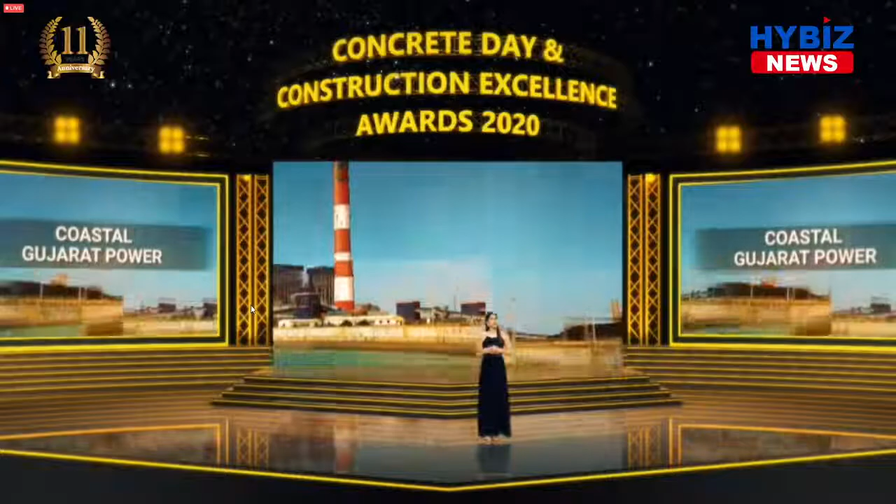Monumental structures like the Statue of Unity, Bandra-Worli sea link, metro rails, coastal Gujarat power projects, Motera Cricket Stadium, and the Bogibeel Rail Bridge project, along with the most recently inaugurated Atal Tunnel, are testimony to some exemplary collaborations in nation building.

A visual gallery of these structures is available for your personal viewing in our pre-function area on the landmark wall.

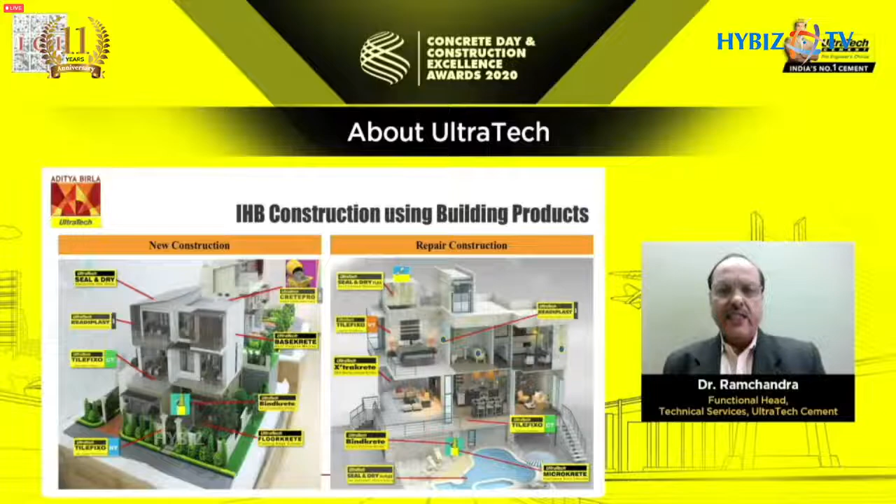Building stronger bonds every day. The Aditya Birla Group is committed to bringing positive changes while building the future of the nation. Reflecting its values, brand UltraTech is not just the strongest, biggest and largest in the industry on several fronts, but has also pioneered cutting-edge technologies from products to logistics. Can we have the AV, please?

A vision becomes a milestone when it helps make our lives richer with love and laughter, when it helps make a cleaner, smarter, and more beautiful planet, so that you can set off on joyous new journeys and adventures. Building stronger bonds and bridging impossible distances, which take you from the ever new to the forever beautiful, opening up vistas and windows to a vibrant new world. A vision becomes a milestone when it touches millions of lives every single day. Aditya Birla Group, big in your life.

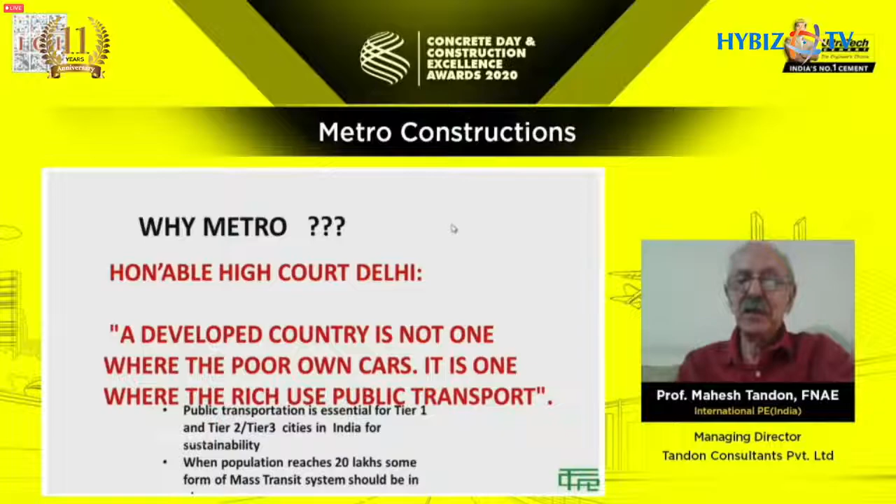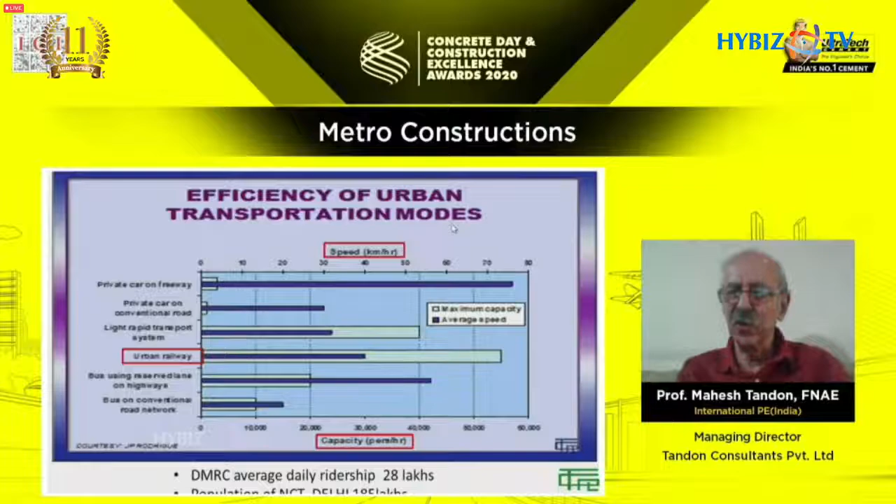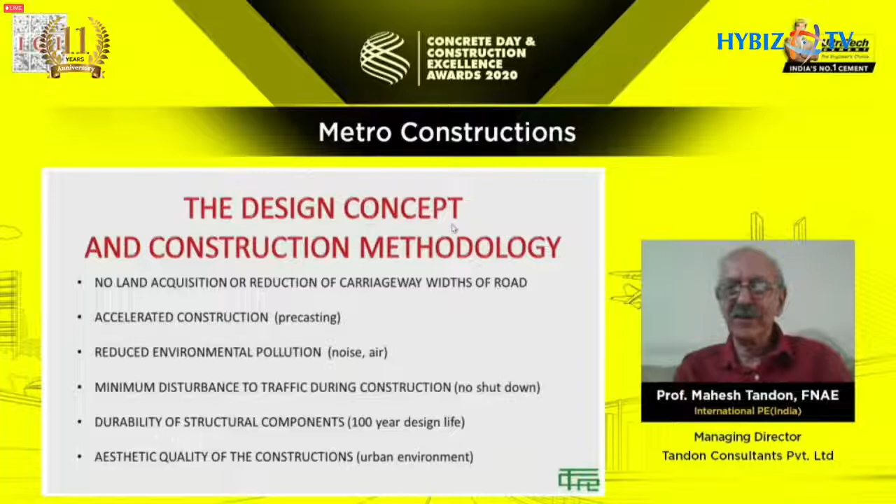Finally, the aesthetic quality of the construction becomes more important because these metros are in the urban environment, and their aesthetics counts a lot. If you want people to own this mode of transportation and be proud of it, then it must look good also.

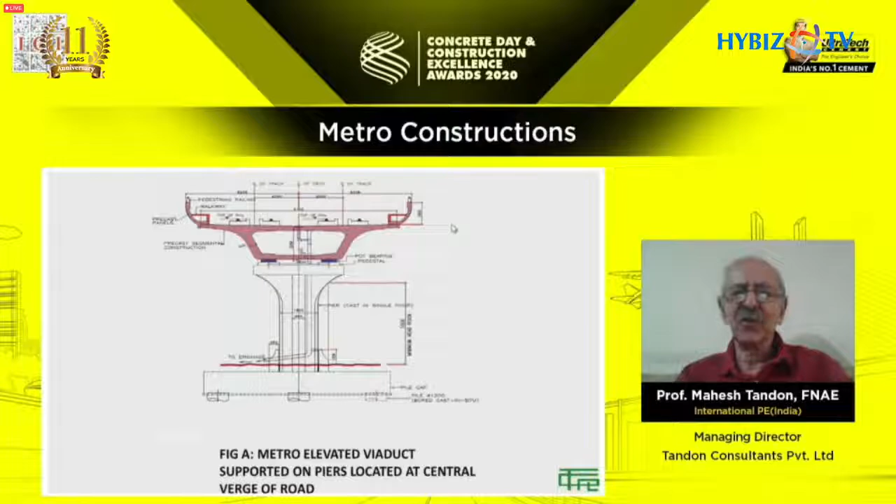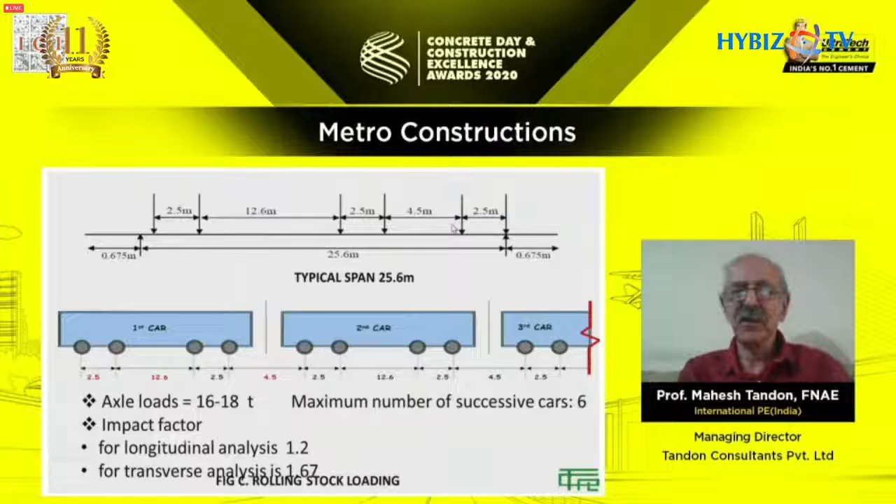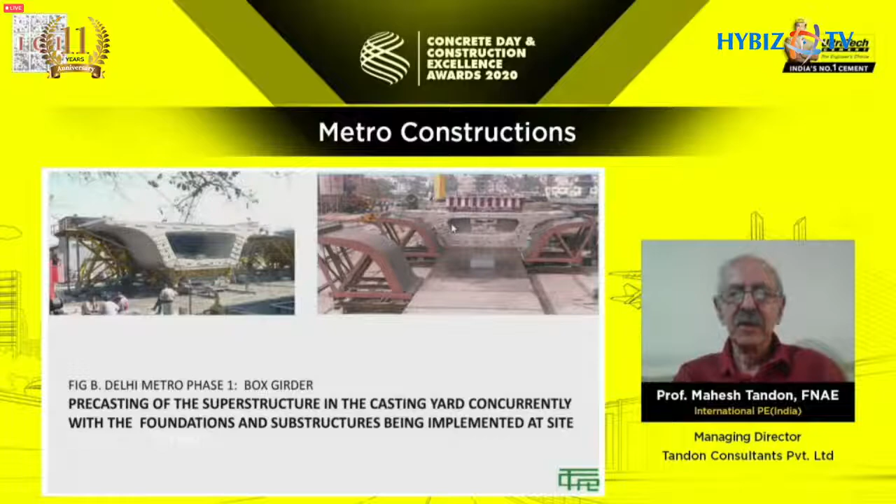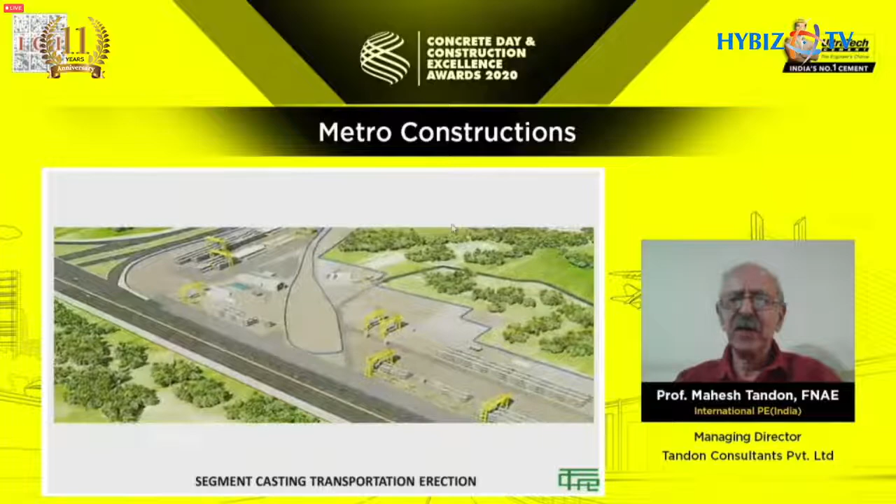I want to show you a small clip which demonstrates exactly what the precasting technology is, in very few words or very few pictures. So here you can see something which is in the casting yard.

What is happening is that there is already a precast segment which you see behind. In front of it, we are lowering a steel cage which is put in position. Here you can see the internal shutter being put in position. So you have got the sides already in position, you've got the reinforcement in position, and now we are sliding in the bottom shutter. It is like a tunnel formwork, if you may call it that.

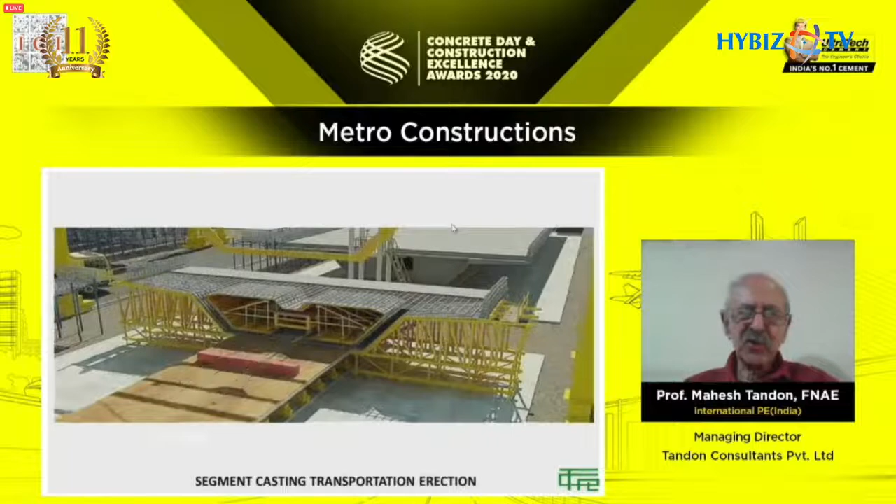Once this is in position, we can close the ends so that it is ready for concreting, and that is what you are going to see in a minute. There the ends are closed. Now you've got a compartment which is watertight, and you can put the concrete.

So the concrete, as you can see, is poured against the already existing segment which you saw behind, which is still there. So the concrete, when you pour it, it is all liquid, and the interface between the new concrete and the old concrete will be completely in sync.

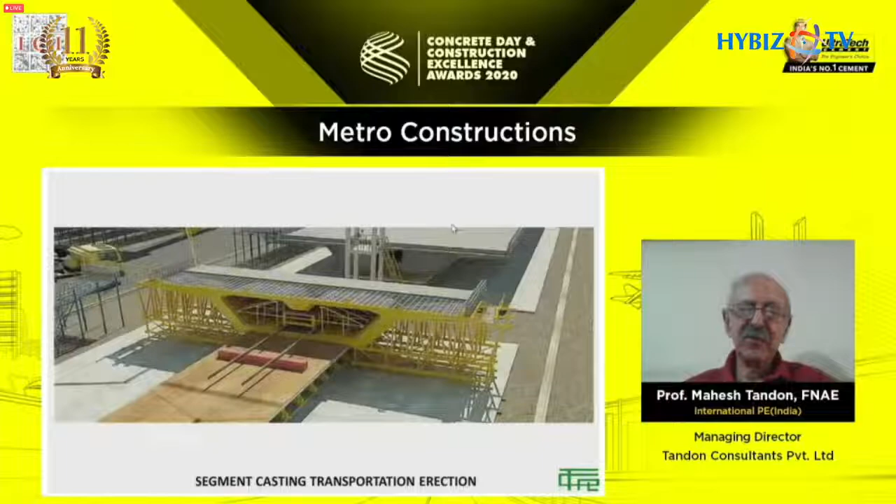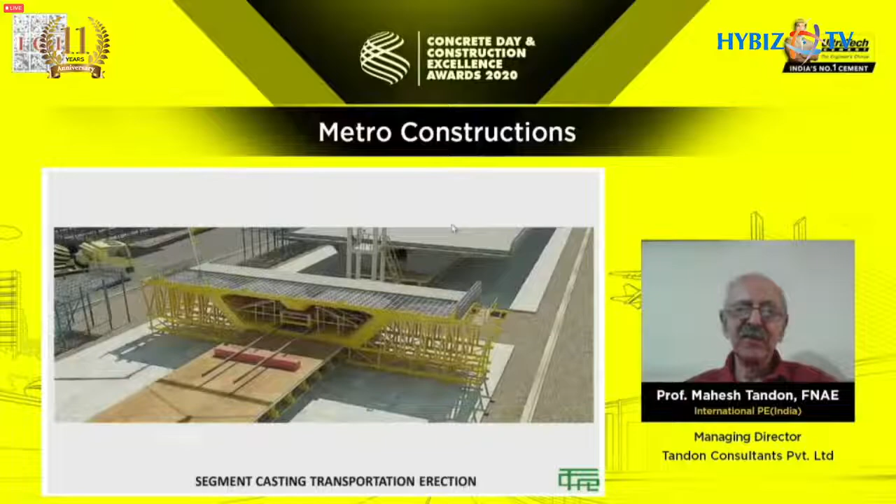That is the whole idea of this technique of precasting, and this is called match casting, because the two faces at the interface are a mirror of each other, so perfect that you couldn't even get that type of perfection even if you were to machine it.

Here you can see the rest of the segments being concreted and put in position much the same way as you saw in the earlier slides. After that, the segments go to the stacking yard.

We require a huge stacking yard because the segments keep on being produced, and you require storage space, which we term the stacking yard. From here, it is taken to the site by the trailer which you just saw, which went past.

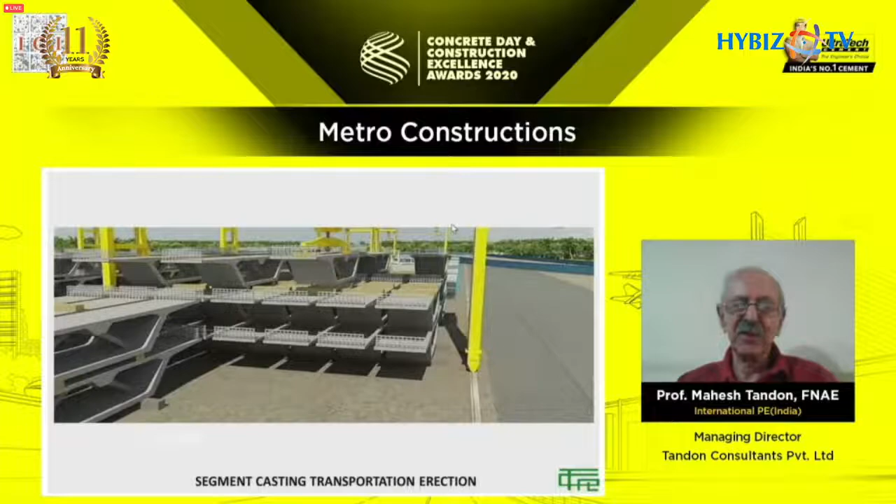What are the types of sections that metro constructions have? On top, you can see a precast, pre-tensioned, full span twin U-girder, meaning there are two tracks and two structures right at the top, shown in pink. You can also have a U-girder with two girders, or two tracks, on the same section. You can also have a box girder, shown in the subsequent two sketches, and of course I-girders, which can be either pre-tensioned or post-tensioned.

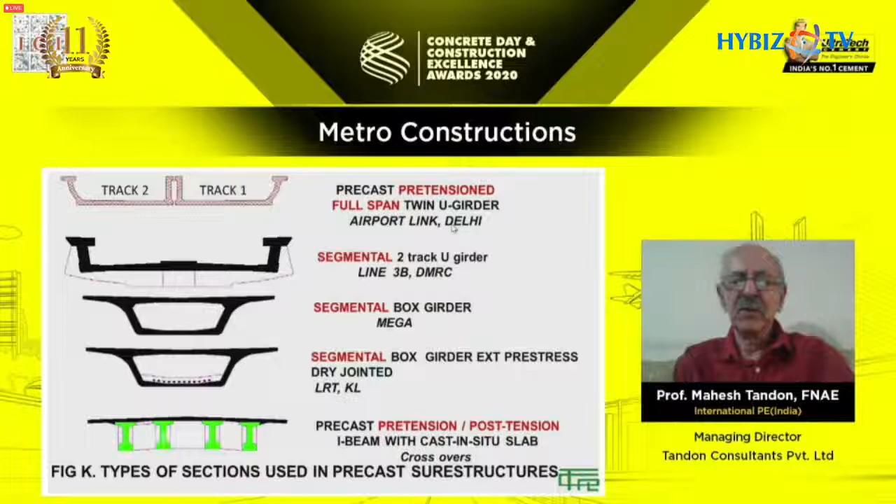The important issue is that in the first sketch at the top, it is a full span, whereas in the next three you have segmental, meaning they are made in small segments, as you saw in the previous slides. The I-beam and I-girders, we know, are for the full length, and that is how it is concreted. It can be pre-tensioned or post-tensioned.

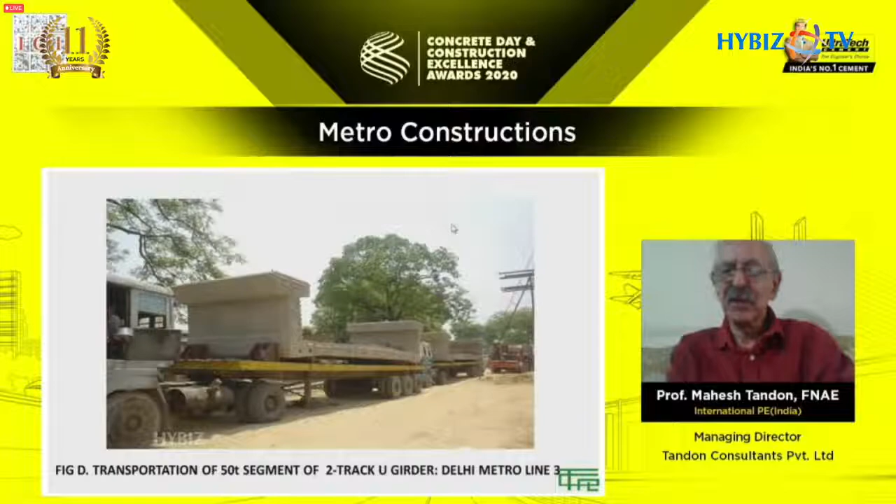The transportation of precast elements depends on whether we are talking about segmental construction or full span. For segmental construction, this is a segment of a U-girder which can carry two tracks, transported on what is called a low bedded trailer. We make it as low as possible so that when taking turns along city roads, it doesn't overturn. You have to keep the center of gravity as low as possible, which is why it's called a low bedded trailer.

Then there is the erection of precast segments after transporting them to the site. For segmental construction there is one type of equipment required, and for full span construction there is another type. If you look carefully, the lines on the superstructure are the segments which have been put in position, hanging from the red launching truss at the top. After they are properly aligned and jointed together, the whole launching truss can move to the next span.

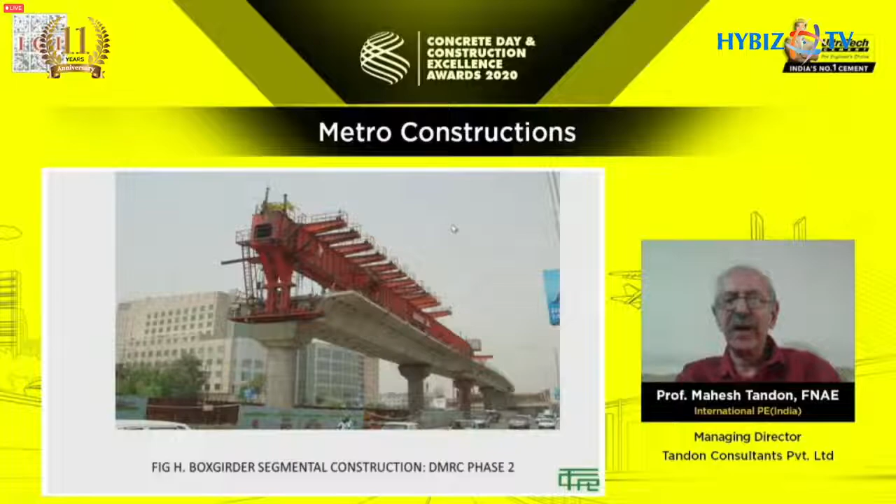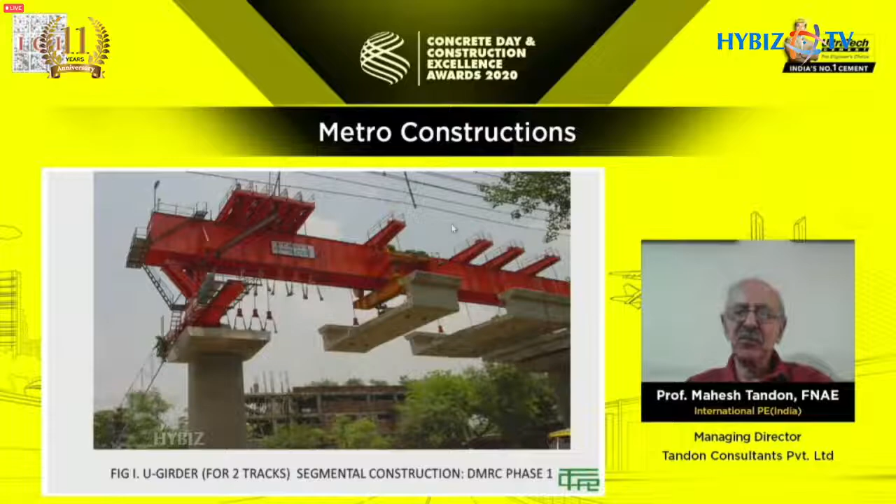So it is also called the self-launching truss. Here you can see another type of precast segmental construction, which is the U-girder, which can carry two tracks at the same time. Now, how does this segmental construction work?

People often ask this question, so let me explain. There are three issues which come into play. One is the match casting, which you have already seen. There are shear keys at the mating surfaces, which you can see clearly. And you can also see that this is going to be pre-stressed. It is the combination of these three issues which makes sure that the segments you have erected there don't fall down. Once you have assembled and pre-stressed, they remain in position.

Here you can see the shear force. Shear is being transferred across the joint, which is the interface of the shear keys. By these horizontal arrows, you can see the pre-stress. So if one segment has to displace vertically against the other, it can't, because the shear keys will not let it happen. And the two segments cannot go apart because of the pre-stressing. This is the technique which makes sure you can do the segmental construction, and all three are necessary.

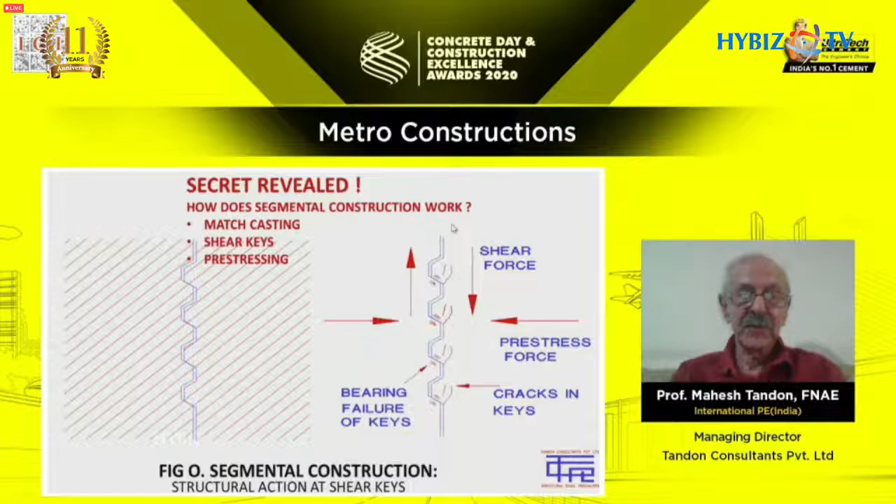Let's go to the next one. Standardization is the key to precast segmental construction technology. The spans need not be the same across the entire alignment. As a matter of fact, they often keep varying depending on the type of obstacles you have to cross. You cannot put the pier wherever you want, even on the central verge - sometimes there are buried services or pipelines. So you have to keep changing the spans, and this flexibility must be introduced in the precast segmental technology used for metro constructions.

But standardization is in this sense: as you can see here, this is a simply supported span, and you will have pre-stressing cables which go from end to end. The central part of the pre-stressing cable is kept horizontal, so that only the ends remain the same. If you look carefully, the end segments do not change, but you keep introducing more and more segments in the middle, where the pre-stressing cable is horizontal.

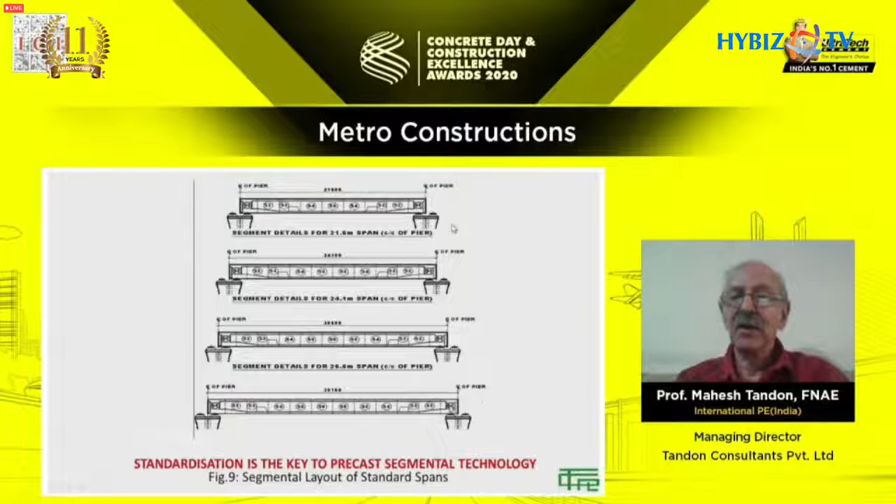To look at it another way, if you look carefully at the bottommost sketch, it has all the segments which constitute the maximum span. If you want to make a smaller span, you take out segments from the middle one by one, and you can keep making the span shorter and shorter.

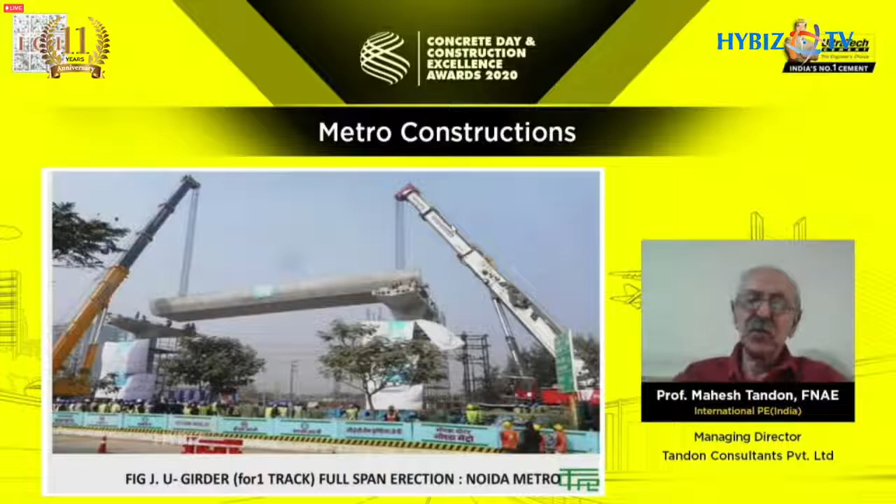When you have a full span erection, which you can see in this slide, you require two cranes as shown, and the girder weight may be as much as 150 tons. You have to pick it up from the transportation trolley which you saw in the earlier slides, and put it in position. Obviously, the width of the road, at least temporarily, must be wide enough to accommodate the vehicle bringing the segment.

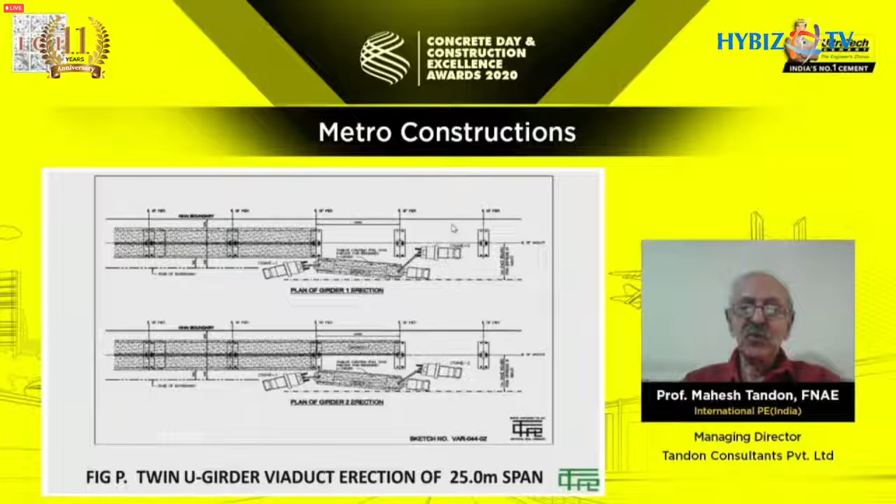The upper sketch shows how the segment has been brought into position. There are two cranes which are lifting it up and putting it in place. Now you have to lift and put in position two girders in the same span. So you can see the first one being lifted in the upper sketch, and the second one being lifted at the bottom in the bottom sketch.

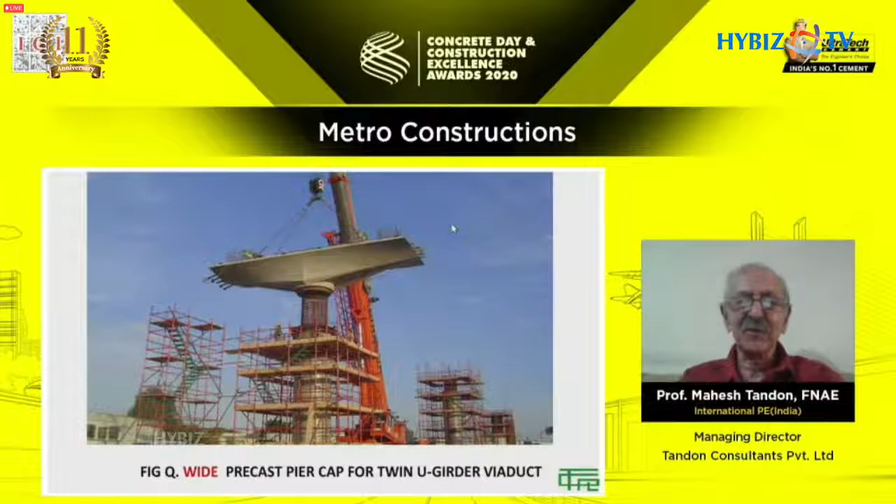And there is something else called a concourse level, which is the first slab from the bottom. And all this must have a roof, which is normally made in steel. So this is what constitutes the station.

The stations are always a problem as far as timing is concerned. Fairly quickly you can make the viaduct, and it goes on at a pace. But of course, the stations are another issue altogether.

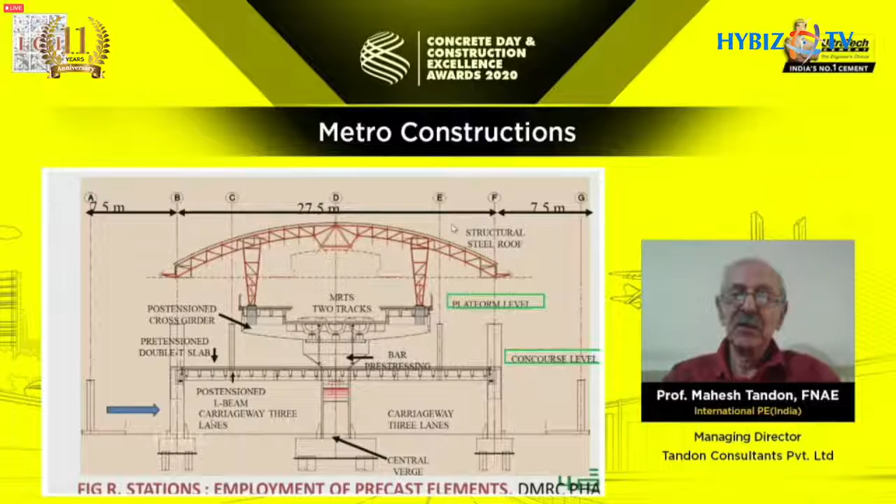If you see a small animation, after making the foundations and the piers, we have to have a sequence of construction, because they are one above the other - what constitutes the concourse level and what constitutes the platform level. So how it is to be done, the sequence is shown here.

This is the post-tensioned girder, normally very heavy. It can go up to 80-90 tons, and it has to be put in position on top and post-tensioned to the pier. Here you can see the making of the concourse slab, and the sequence in which the construction is being made.

This is crucial to plan right in the beginning. The double-T's, as we call them, which constitute the concourse level, are stable by themselves. That is the big advantage of a double-T. Many people try to use single girders, but they are not as efficient, because you have to make sure they don't topple while being put in position.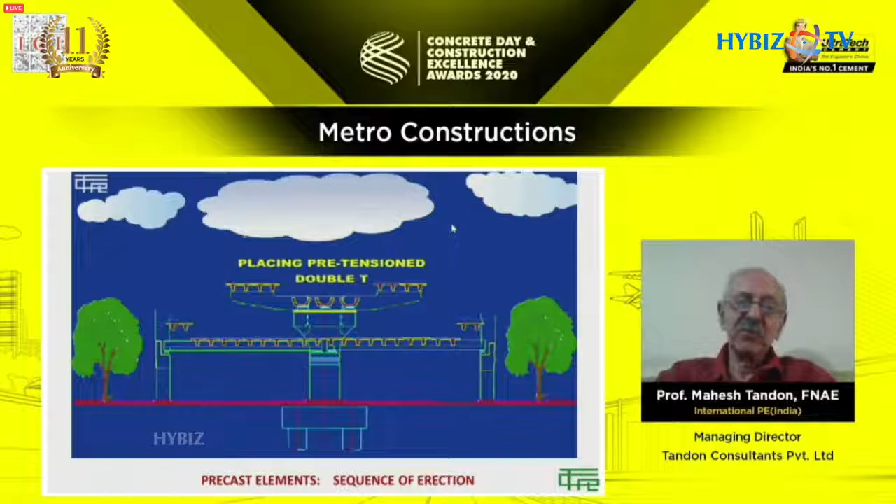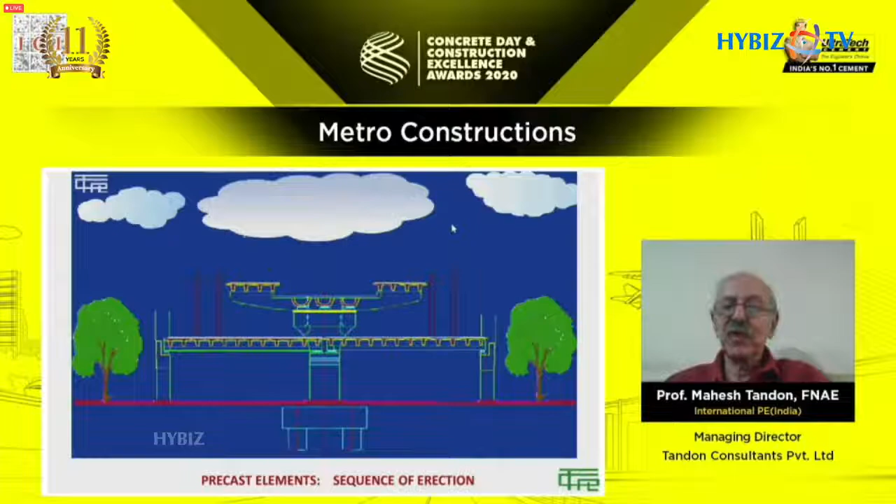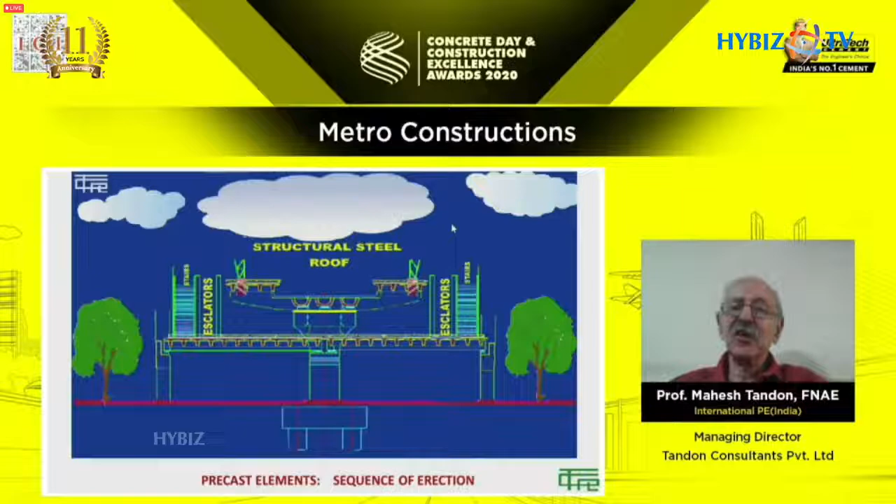So after doing both the platform slabs as well as the concourse slabs, you make the staircases and arrangements for where the escalators are going to come. On top of that, you can see how the structural steel roof is being positioned. The structural steel roof is actually supported on top of the platform, or at the level of the platform, by some means or the other. You can see one scheme here.

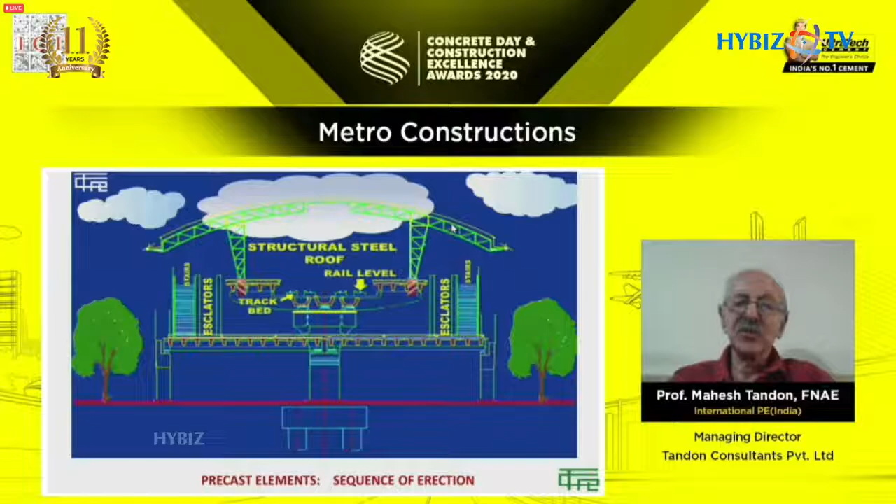Here you can see that pre-tensioned girder being put in position. The technology has now advanced a little bit from the time we started. Here you can see all precast beams, both at the platform level and concourse level, being put in position.

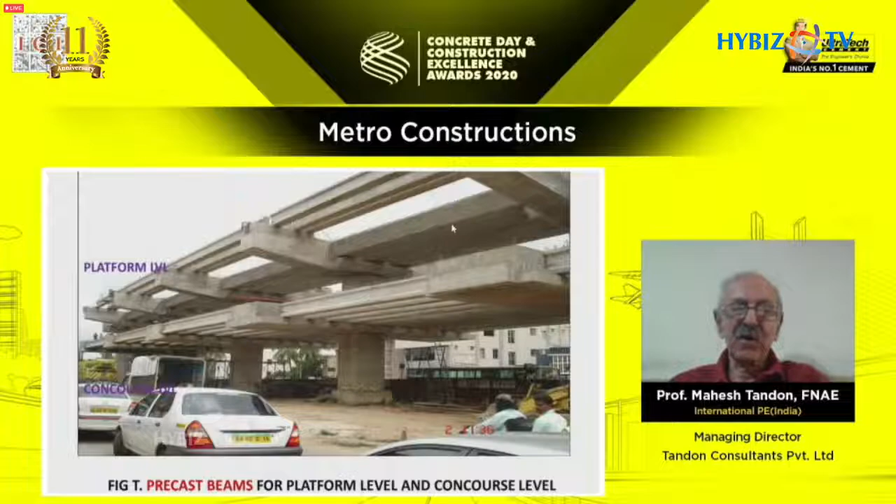Here's another way of doing things which is becoming exceedingly popular - you make the concourse level, which is almost always very wide compared to the platform, and construct it in pieces. For example, in the bottom part that you see, there is a spine beam in the center, and to that is attached on either side what we call the wings.

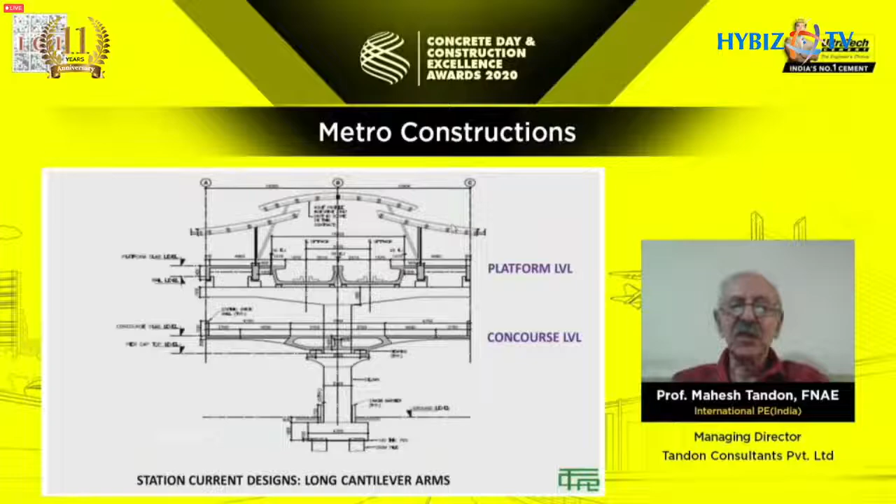Many flyovers etc. have also been constructed in the same manner, but the same techniques are now being used even for making the concourse level structure in precast concrete. Here you can see it in action. This is taken from the Hyderabad Metro, where you can see the box girder.

This is where the train is going to move. On top of this box girder, you can see the platform level slab, which will be at this level, and you can see the concourse level, which is being constructed by wings. In this case, there was no central part - it was just directly connected.

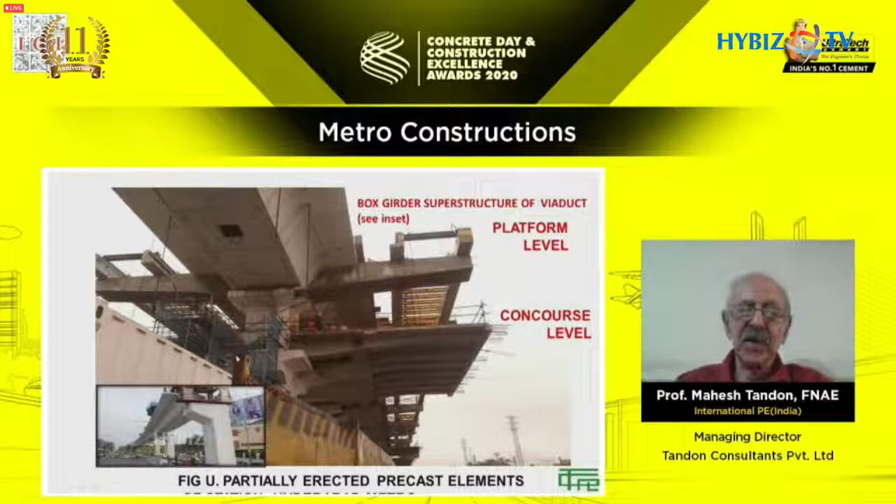So this type of construction is becoming exceedingly popular.

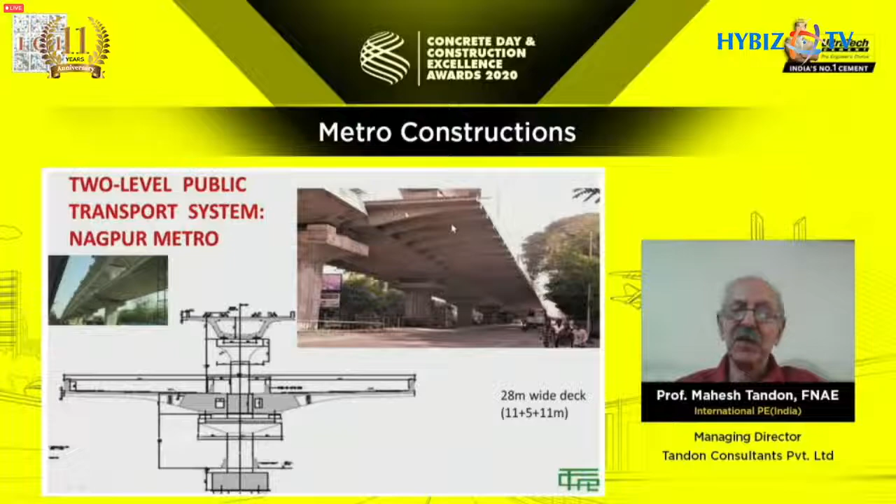Here you can see the spine beam in action, in the center. You've got a 28-meter wide concourse level, and then you've got the box girder which is supporting the tracks at the top. Here you can see it under construction. These are called wings, which are being attached to the spine beam at the center.

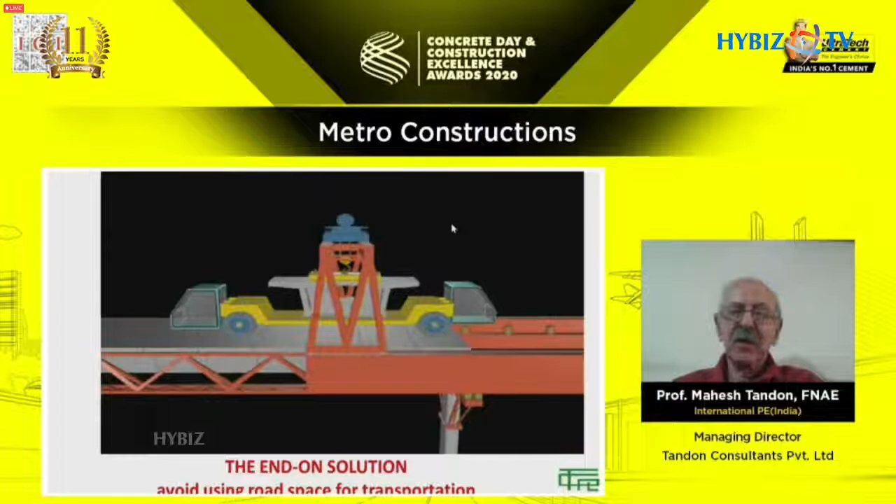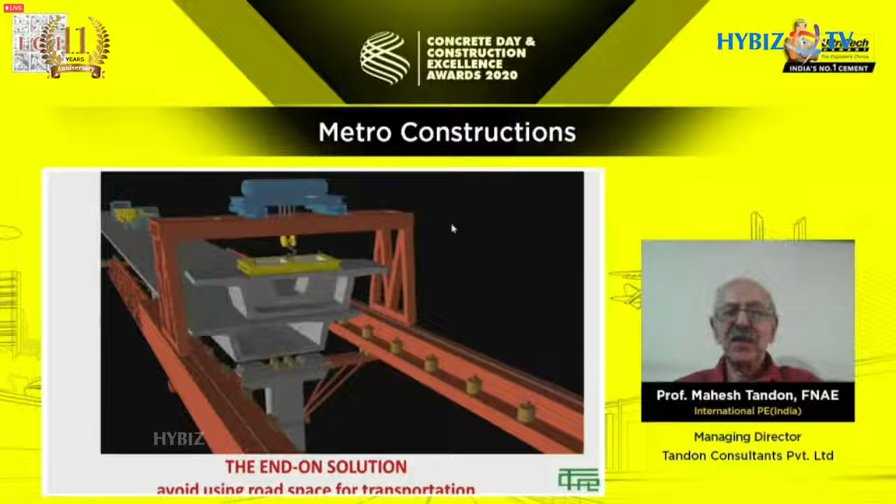So what else is in the future? One of the things is fewer people like the idea that you transport the segments on the roads on which they travel. You should find some other way. This is called the end-on solution, which means you use the already constructed part of the viaduct and bring the segments on top. That means it's a construction which is more or less top-down - you don't use the roads to transport the segment, but it's brought by a vehicle on the already constructed portion and then lifted and put in position, as you can see here.

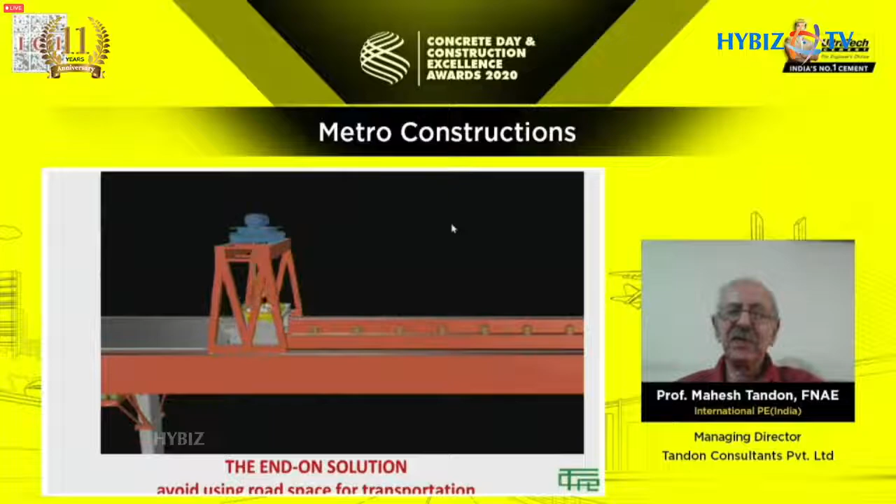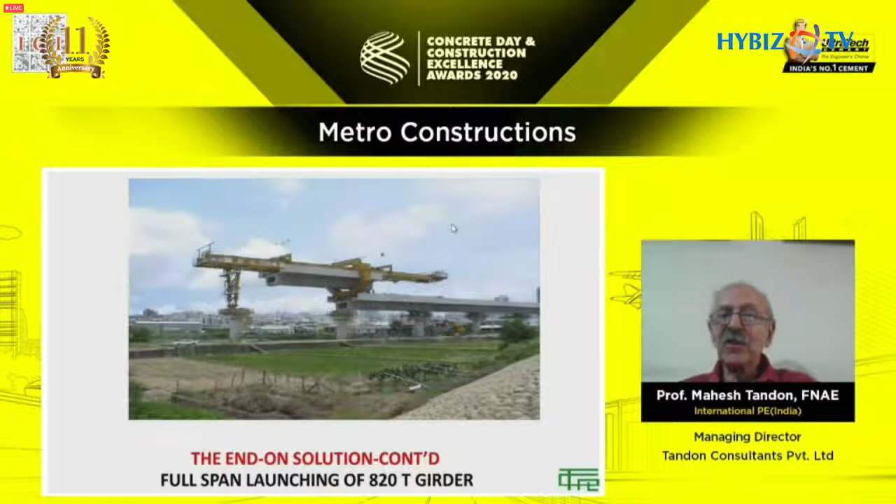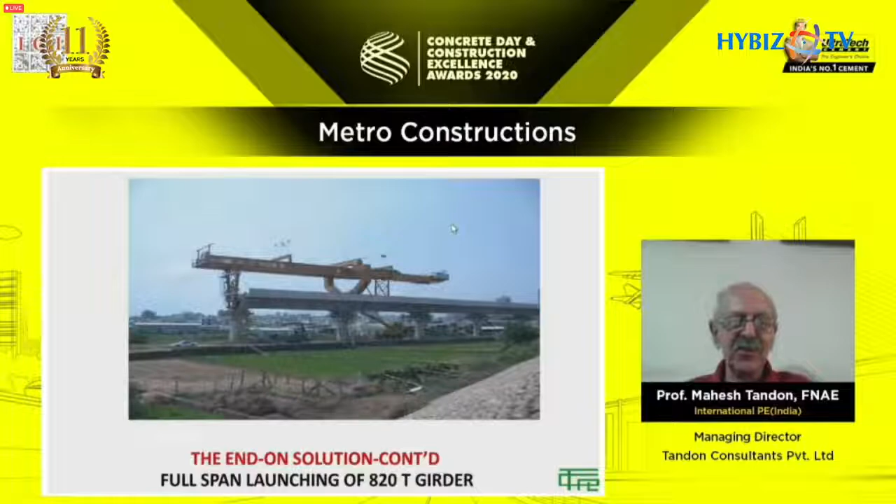Here is another end-on solution, which I think is going to become extremely popular in the days to come, because people don't like their day-to-day activities being disturbed just because you have to transport a segment or a full span on the roads itself. So you are using the already constructed portion and this equipment, which is also a launching girder, to put an 820-ton girder in position. So this is what the future holds - you will not be able to use the ground level roads too often, and people will expect that you will do all these activities of erection from the top.

Okay, thank you very much for your kind attention, and let us have a virtual handshake.

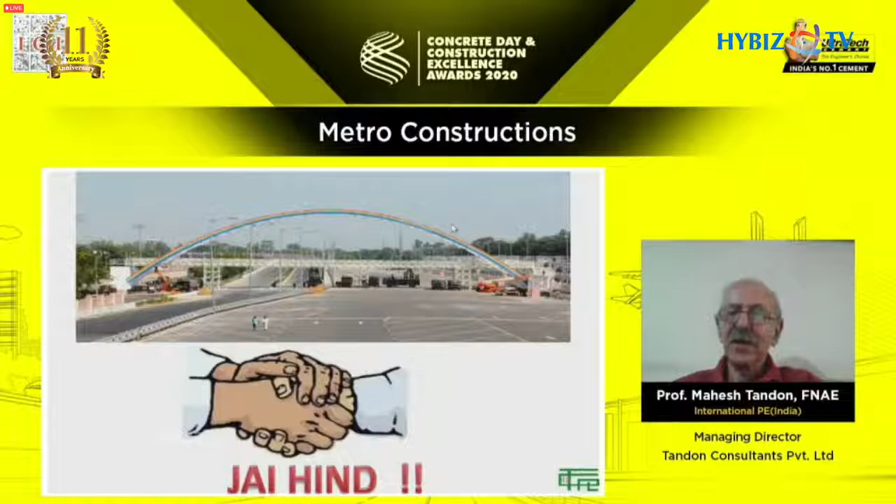Thank you for your inspiring words, sir.

Our journey runs parallel to the journey of India's growth. Over the years, the ICI Ultratech Concrete Day and Construction Excellence Awards have celebrated you, the leaders of the fraternity, and your achievements. This year too, the celebration will continue and be written in our history books. These memories will forever be etched in our minds and hearts. Let's go back in time and look at how far we have come together as a family in this nation-building journey. Each milestone holds a huge significance in our voyage. Let's look at the...

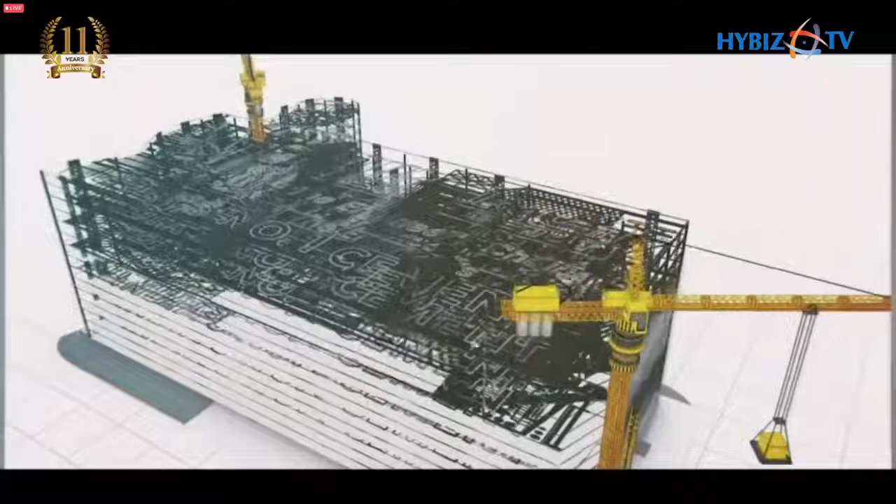Formation Day of Indian Concrete Institute, that is September 7, is celebrated as Concrete Day all over India. To embrace this occasion, the first Ultratech ICI Award ceremony started in September 2010 by giving two awards in Bangalore annually - the Ultratech Endowment Award for Outstanding Concrete Engineer of the Year and the Birla Super Endowment Award for Outstanding Concrete Structure of the Year. Today, the awards stand as the pinnacle of achievements for the fraternity and a beacon for aspiring talent to strive for. These awards are the most coveted awards now in the construction industry and are presented in an august gathering of stalwarts from all segments of the industry.

The ICI Ultratech Concrete Day and Construction Excellence Awards started as the beginning to many possibilities, which initiated in one city and has spread out to over 30 locations. As our mission goes further, what we truly cherish is that our bond grows stronger. Today is the day to honor all the revered engineers who have stood apart with their creativity, a combination of art and science, and in this current unprecedented situation when physical events seem infeasible, Indian Concrete Institute and Ultratech Cement are illustrating their readiness for change and have quickly adapted to the current phase, which is digital. Miles separate us, but emotions bind us tighter than ever.

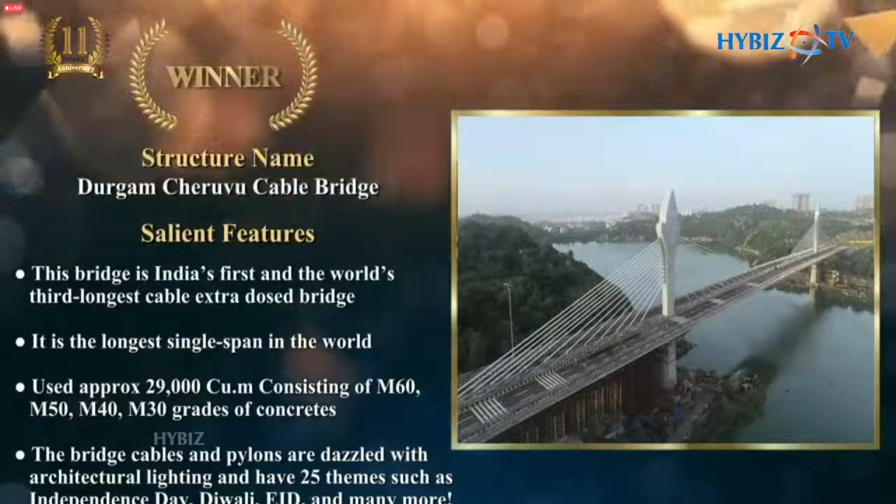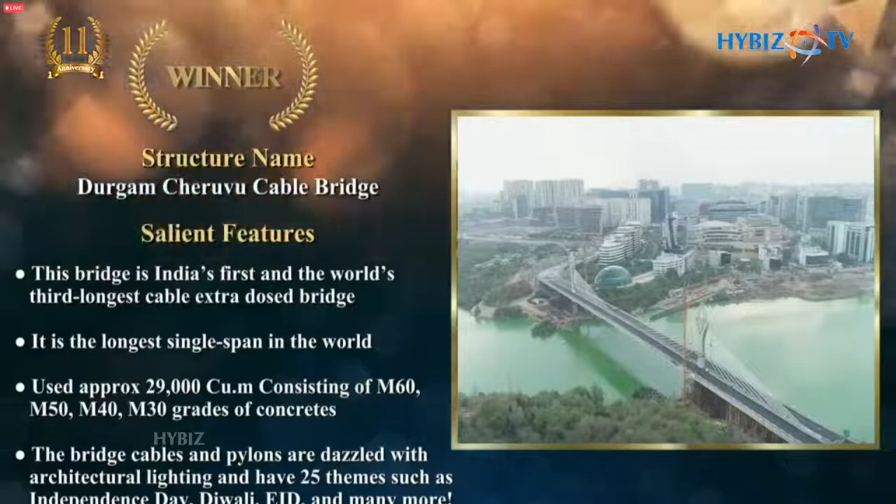Structure name: Durgam Cheruvu Cable Bridge. Salient features: this bridge is India's first and the world's third longest cable extra-dosed bridge. It is the longest single span in the world. Used approximately 29,000 cubic meters consisting of M60, M50, M40, M30 grades of concrete. The bridge cables and pylons are dazzled with architectural lighting and have 25 themes such as Independence Day, Diwali, Eid, and many more. High-frequency mechanical vibrators have been used for the Durgam Cheruvu cable bridge.

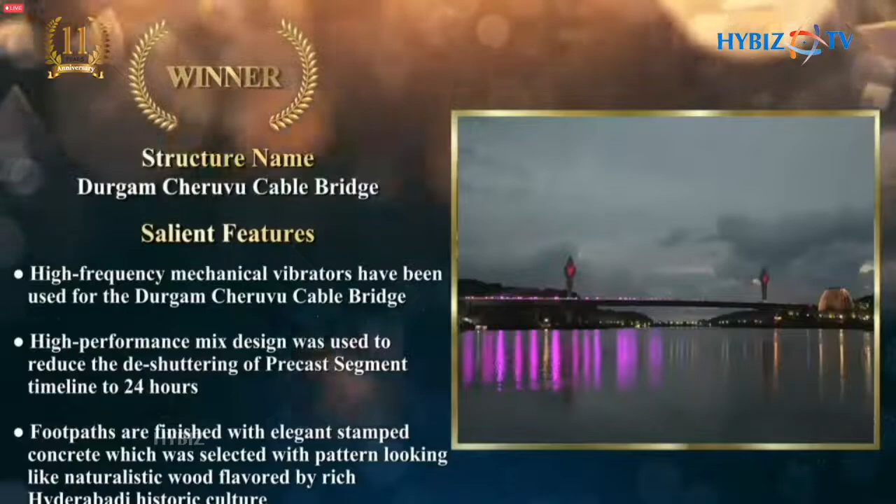High-performance mix design was used to reduce the de-shuttering of precast segment timeline to 24 hours. Footpaths are finished with elegant stamped concrete, which was selected with a pattern looking like naturalistic wood, flavored by rich Hyderabadi historic culture.

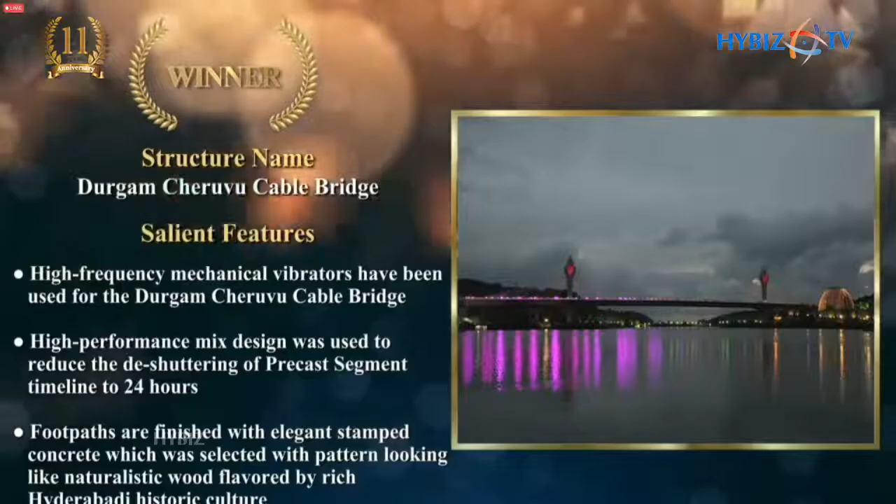Owner name: Mr. S. Venkataramana SE, GHMC. Structural Consultant Engineer: Engineer Atul S. Bokil, Chief Manager, STUP Consultants. Contractor Builder: Mr. Ranganathan, Project in Charge, L&T Constructions Limited.

Moving on to the next category of tonight's awards: ICI Ultratech Well-Built Residential Building Award, Hyderabad. Please join me in welcoming our winner.

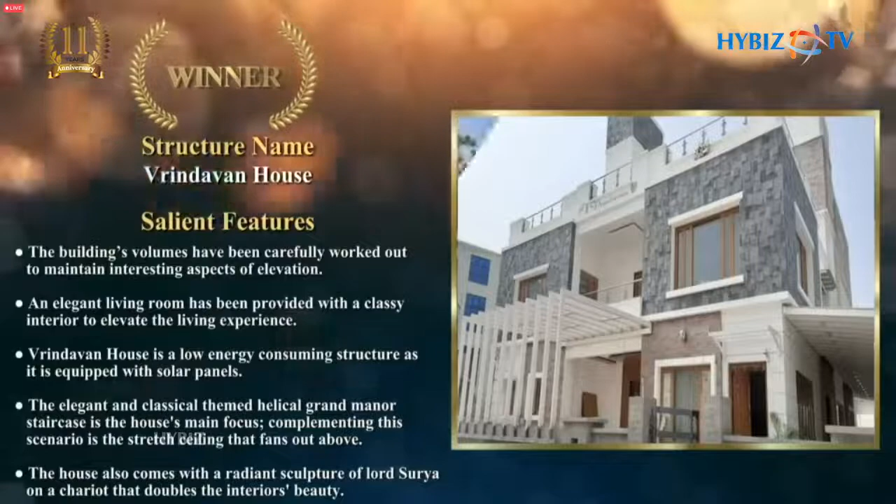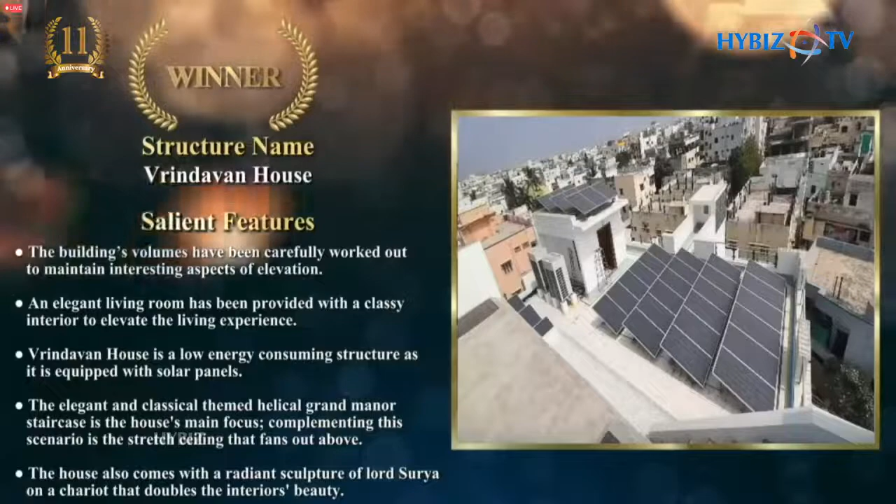Structure name: Vrindavan House. Salient features: the building's volumes have been carefully worked out to maintain interesting aspects of elevation. An elegant living room has been provided with a classy interior to elevate the living experience. Vrindavan House is a low energy consuming structure as it is equipped with solar panels. The elegant and classical themed helical grand manor staircase is the house's main focus. Complementing this scenario is the stretched ceiling that fans out above. The house also comes with a radiant sculpture of Lord Surya on a chariot that doubles the interior's beauty.

Owner name: Mr. Thota Uma Maheshwar Rao. Architect: Ajender Prasad, Prasad Architects. Structural Consultant Engineer: Engineer Javed Jilani Khan, Metro Engineering Consultants.

Ladies and gentlemen, the next category of ICI Ultratech Awards is Well-Built Residential Building Award, Karimnagar. And our winner is...

Structure name: Shukla Home. Salient features: the structure is a beautiful modern landscape with sufficient open areas all around for natural lighting and ventilation. Shukla Home has comfortable and straightforward interiors for private spaces, intending to give the resident the desired experience and privacy. The house effectively utilizes the area, hence no part of land was wasted. The building has an aesthetic elevation. It was made using the inclined column technique. To enhance the beauty of the building, a lawn has been designed with a spacious parking zone and children's playing area.

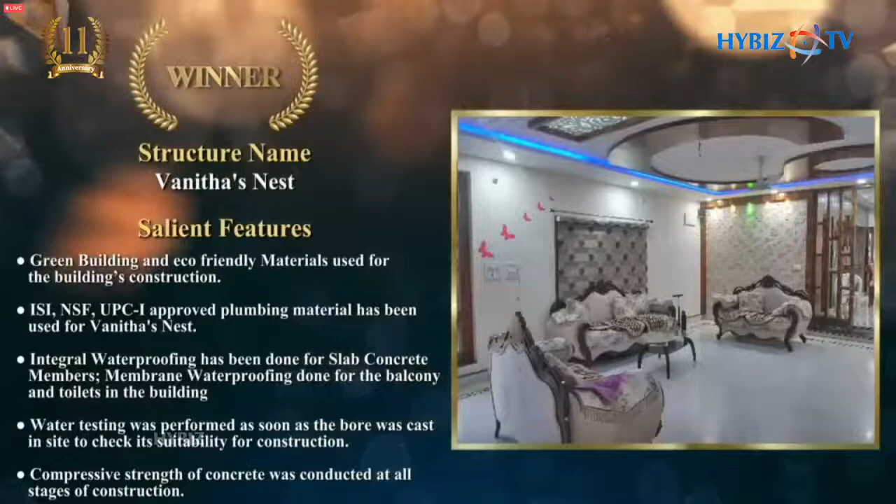Structure name: Vanitha's Nest. Salient features: green building and eco-friendly materials used for the building's construction. ISI, NSF, UPC-I approved plumbing material has been used. Integral waterproofing has been done for slab concrete members, membrane waterproofing done for the balcony and toilets. Water testing was performed as soon as the bore was cast to check its suitability for construction. Compressive strength of concrete was conducted at all stages of construction.

Owner name: Mr. Sunil Kumar. Structural consultant engineer: Engineer S. Prithvi Raj.

Ladies and gentlemen, allow me to introduce the next category of tonight's awards. Category: ICI Ultratech Well-Built Residential Building Award, Khammam. Let's have a huge round of applause for the winner.

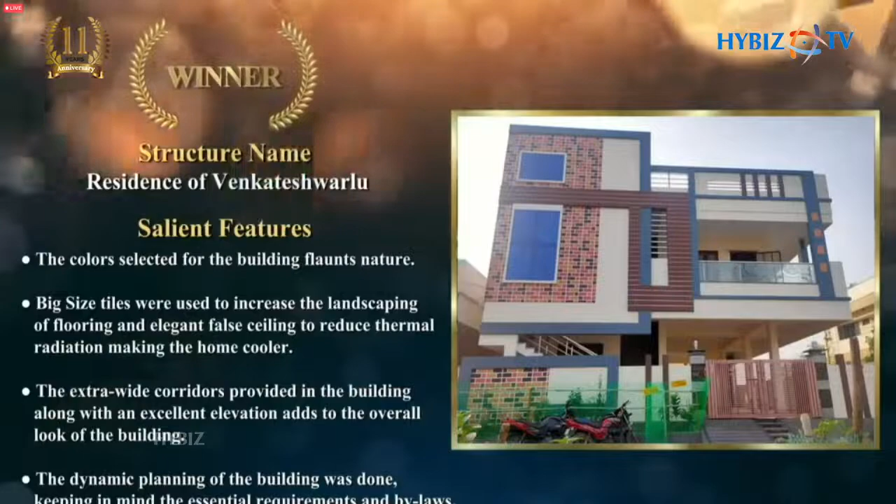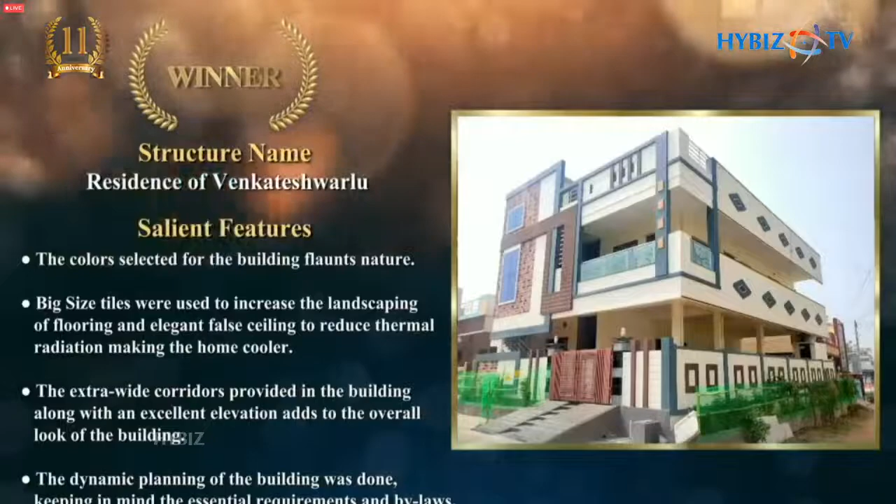Structure name: Residence of Venkateshwarlu. Salient features: the colors selected for the building flaunt nature. Big size tiles were used to increase the landscaping of flooring, an elegant false ceiling to reduce thermal radiation, making the home cooler. The extra wide corridors provided in the building, along with an excellent elevation, add to the overall look. The dynamic planning of the building was done keeping in mind the essential requirements and bylaws.

Owner name: Mr. B. Venkateshwarlu. Structural consultant engineer: Engineer M. Srinivas Kumar. Contractor builder: Mr. D. Nagesh.

Let's move on to the next category of tonight's awards. Category: ICI Ultratech Well-Built Residential Building Award, Nirmal. Please welcome our winner.

Structure name: Residence of G. Gangadhar. Salient features: the building is designed to have an aesthetic elevation. The thoughtful interiors with wide openings invite ample light into the house. M25 grade of concrete was used for slabs and M30 for columns. Designs have transformed over time from the once sterile white walls and stark decor to vibrant colors and eye-catching materials on the interior and exterior.

Owner name: Mr. Gumala Gangadhar. Architect: Kushila Vidyasagar. Structural consultant engineer: Donikela Srinivas.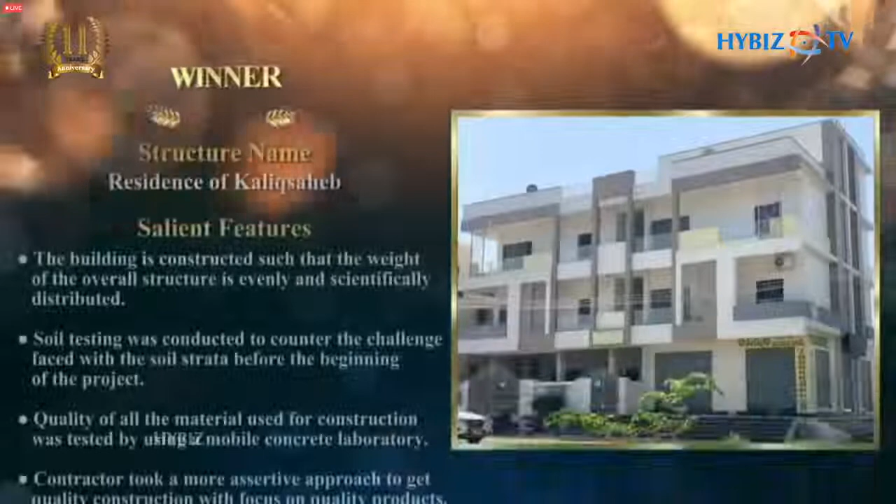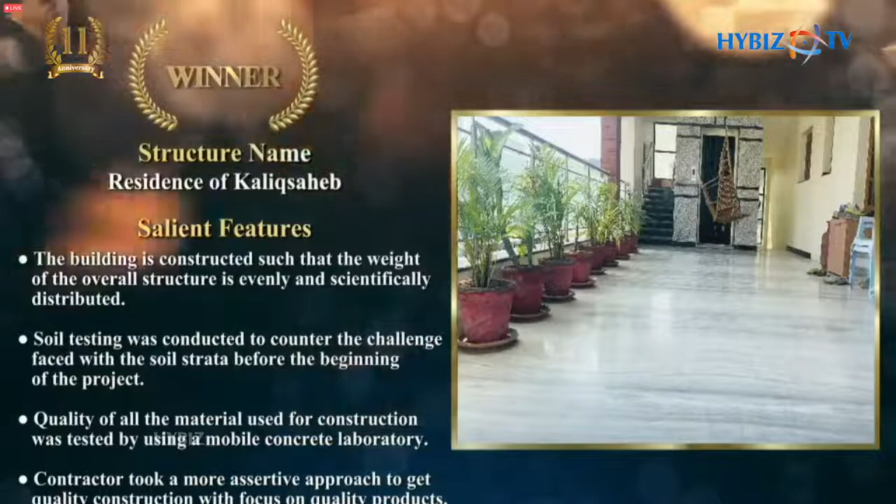Structure name: Residence of Kaliqsaheb. Salient features: the building is constructed such that the weight of the overall structure is evenly and scientifically distributed. Soil testing was conducted to counter the challenge faced with the soil strata before the beginning of the project. Quality of the material used for construction was tested using a mobile concrete laboratory. The contractor took a more assertive approach to achieve quality construction with focus on quality products.

Owner name: Mr. Muhammad Khalid. Architect: Muhammad Tanzil Shavez Ali. Structural consultant engineer: Muhammad Hidayat Ali.

Allow me to introduce the next category of tonight's awards. Category: ICI Ultratech Outstanding Commercial Building Award, Hyderabad. The winner is...

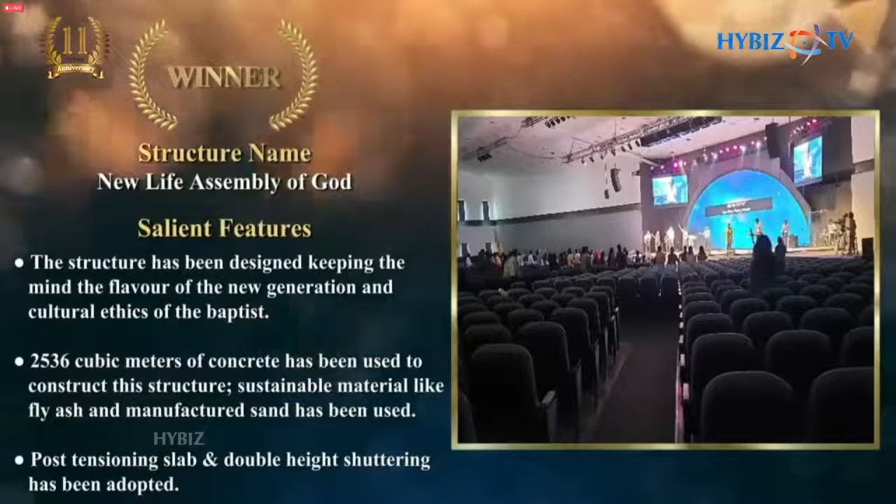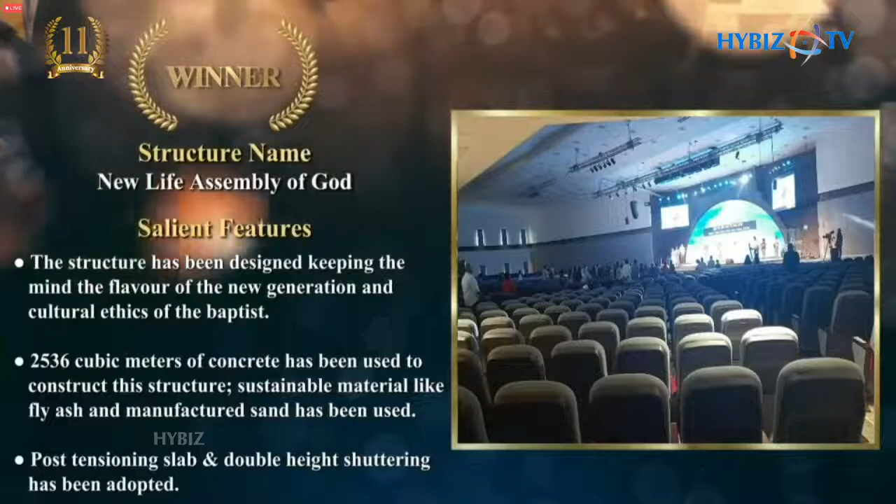Structure name: New Life Assembly of God. Salient features: the structure has been designed keeping in mind the flavor of the new generation and cultural ethics of the Baptist community. 2,536 cubic meters of concrete have been used to construct this structure. Sustainable materials like fly ash and manufactured sand have been used. Post-tensioning slab and double height shuttering have been adopted. The parking space was constructed using pervious concrete to recharge the groundwater. Due to the loose and loamy soil at the site, a thorough investigation was carried out to ascertain the structure's stability. The selection and placement of customized items for the interiors helps the church emphasize and accentuate the design of the spaces in it.

Architect: Siri Purappu Sankar. Structural consultant engineer: Saddi Mahinder Reddy.

And our next category is: Category ICI Ultratech Outstanding Commercial Building Award, Ranga Reddy. Please put your hands together for our winner.

Structure name: Vishwa Vishwani Group of Institutions. Salient features: a total of 2,097 cubic meters of concrete was used to construct this structure. It is a low energy consuming structure as it is equipped with solar panels. To combat the isolation often associated with busy residential buildings and gated communities, wide passages have been made at ground level to facilitate pedestrians with walkways and footpaths. The design's excellence stems from its splendid verticality and sleek silhouette wrapped in a glass curtain wall with steel mullions. Outdoor gathering spaces have been located in front of every block's entrance, with a span of 36 feet, catching the beholder's eyes.

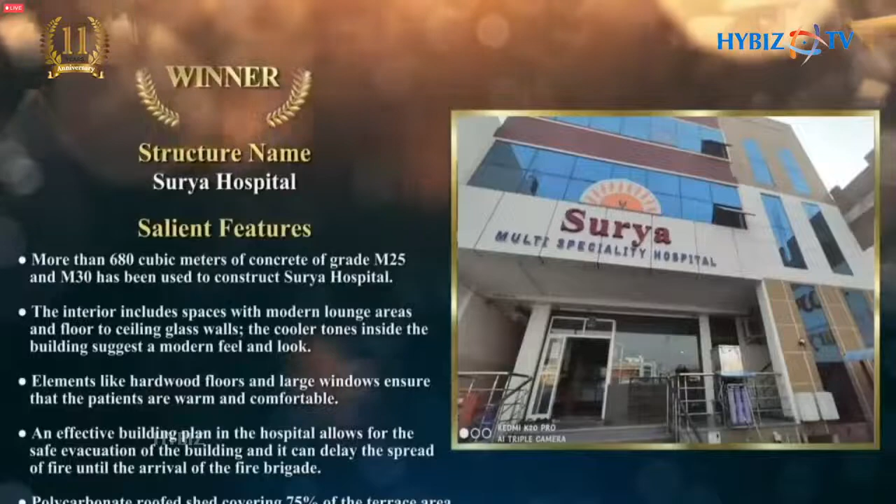Structure name: Surya Hospital. Salient features: more than 680 cubic meters of concrete of grade M25 and M30 has been used to construct Surya Hospital.

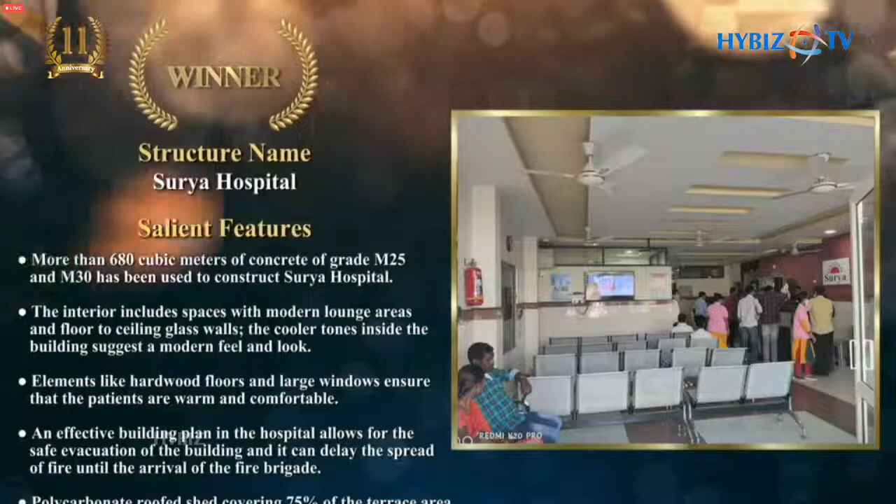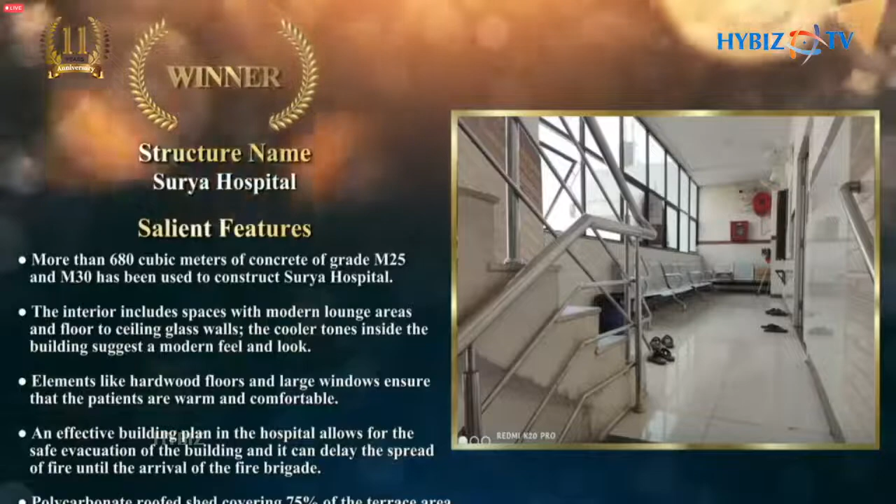The interior includes spaces with modern lounge areas and floor-to-ceiling glass walls. The cooler tones inside the building suggest a modern feel and look. Elements like hardwood floors and large windows ensure that the patients are warm and comfortable.

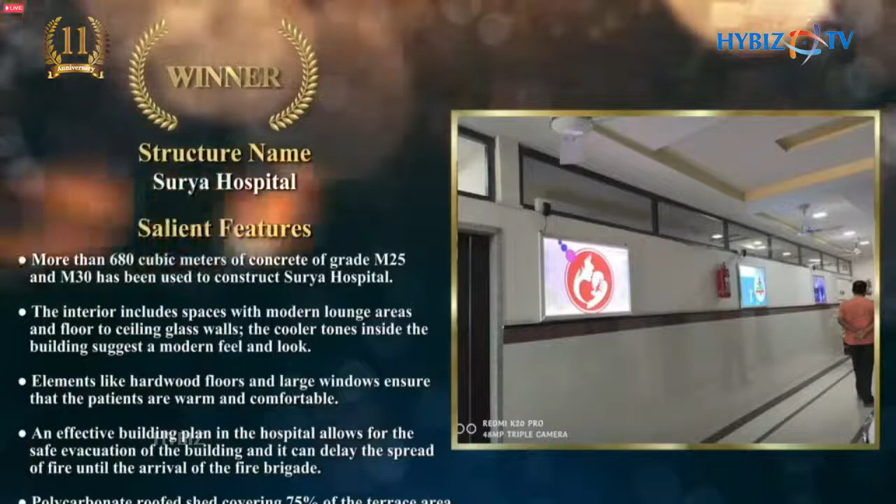An effective building plan in the hospital allows for the safe evacuation of the building, and it can delay the spread of fire until the arrival of the fire brigade. Polycarbonate roof shed covers 75% of the terrace area.

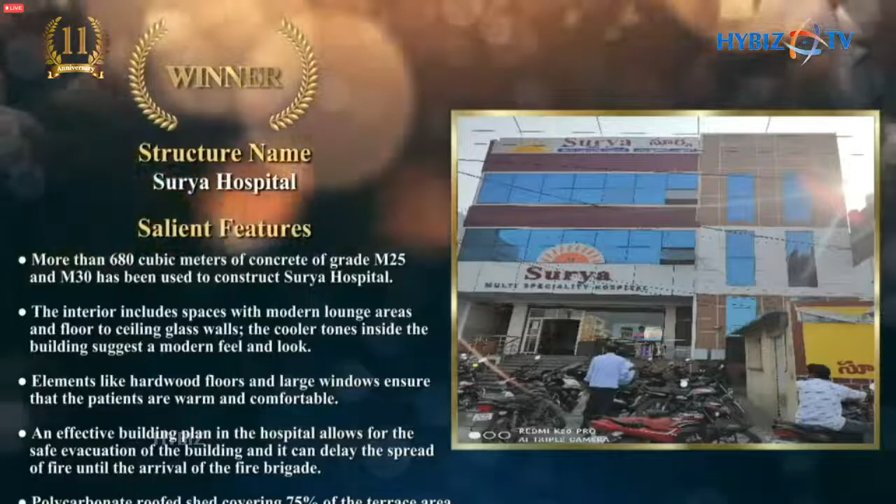Owner name: Mr. Utnor Lingagaud. Structural Consultant Engineer and Contractor Builder: Engineer Rajkumar Puppalla.

And the next category of tonight's awards is ICI Ultratech Outstanding Commercial Building Award, Khammam. Please welcome our winner.

Structure name: Happy Homes. Salient features: cross ventilation has been adopted to invite fresh air inside and push the hot air out of the building.

The material used to construct this building has been quality tested. Soil investigation was also conducted.

The 15 residences provided in the apartment are spaced apart such that the residents can play in the common area and cover it with greenery.

The focal point of the apartment attracts with a distinctive entrance and an elegant elevation which gives a warm feeling to the visitor.

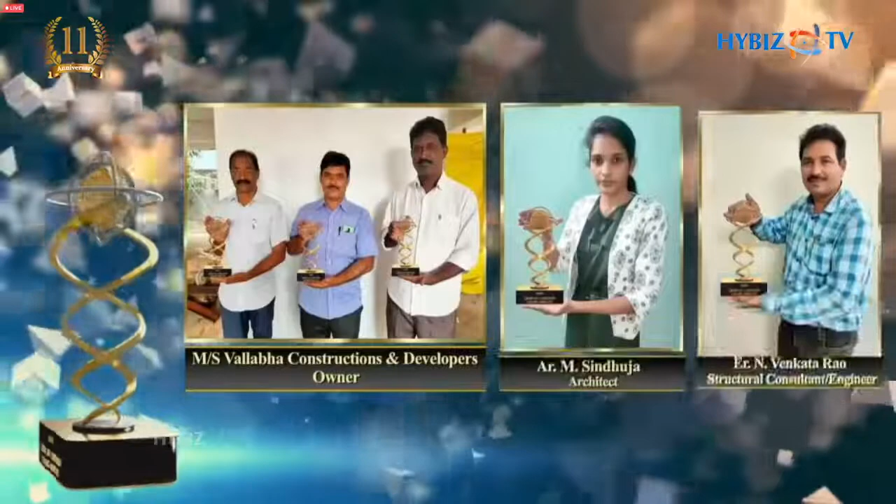Owner name: Messrs. Vallabha Constructions and Developers. Architect: M. Sindhuja. Structural Consultant Engineer: Engineer N. Venkata Rao.

Moving on to the last category of tonight's awards: ICI Ultratech Outstanding Commercial Building Award, Warangal. The winner is...

Structure name: Sri Krishna Pediatric Hospital. Salient features: the smart lift system has been adopted, which allows for faster vertical movement of patients and the public in the hospital.

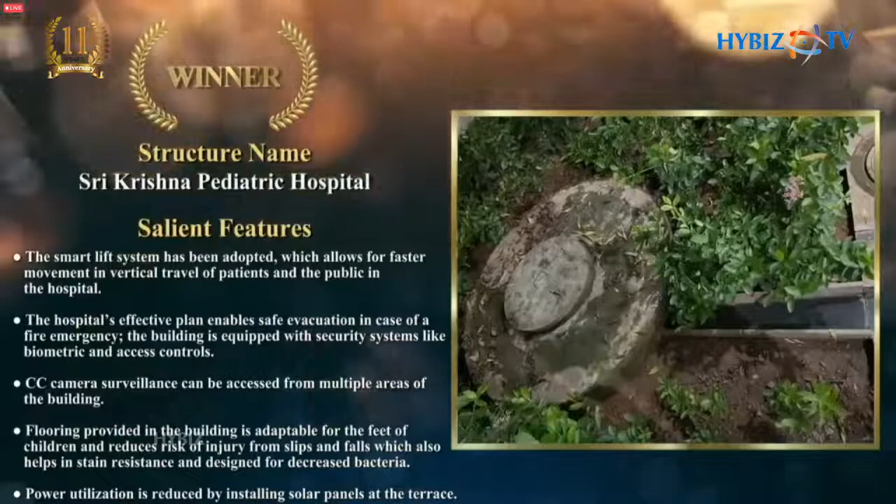The hospital's effective plan enables safe evacuation in case of fire emergency. The building is equipped with security systems like biometric and access controls. CC camera surveillance can be accessed from multiple areas of the building.

Flooring provided in the building is adaptable for the feet of children and reduces risk of injury from slips and falls, which also helps in stain resistance and is designed for decreased bacteria. Power utilization is reduced by installing solar panels at the terrace.

Owner name: Dr. Rajkumar. Architect and Structural Consultant Engineer: Architect Engineer D. Shyamkumar. Contractor Builder: Mr. P. Srinivasa Reddy.

Allow me to introduce you to the next category of tonight's awards: ICI Ultratech Outstanding Concrete Engineer Award.

He is a gold medalist in civil engineering from the prestigious Regional Engineering College, Warangal, and completed his MTech in structural engineering with flying colors from IIT Kanpur. As part of the Indian Engineering Services, he worked as an officer in the Indian Railway Service of Engineers.

He has designed multiple remarkable structures including the Hallmark Technology Park at Chennai, Yashoda Hospitals at Secunderabad, and JNTUH Auditorium at Kukatpalli, Hyderabad.